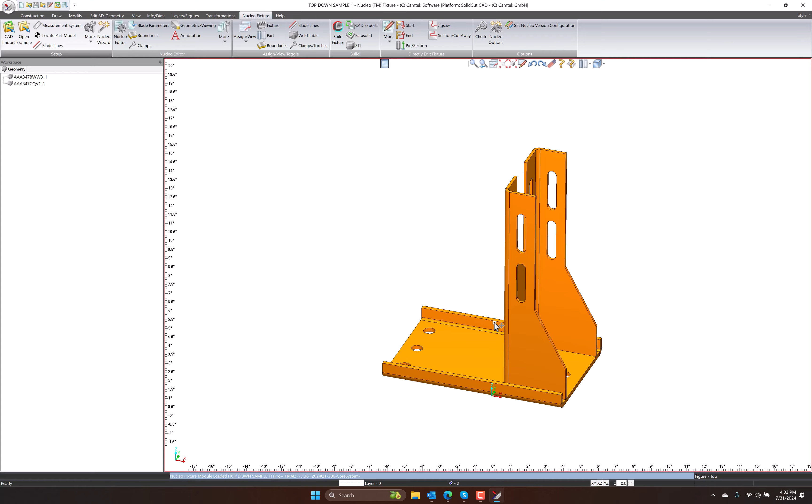Okay, today we're going to be reviewing the new feature that we've recently added called Side Locator. You have a part similar to this where we're welding around the base, but none of that part sticks over top. We know that's difficult in Nucleo to design a fixture for. So we've come up with a new method.

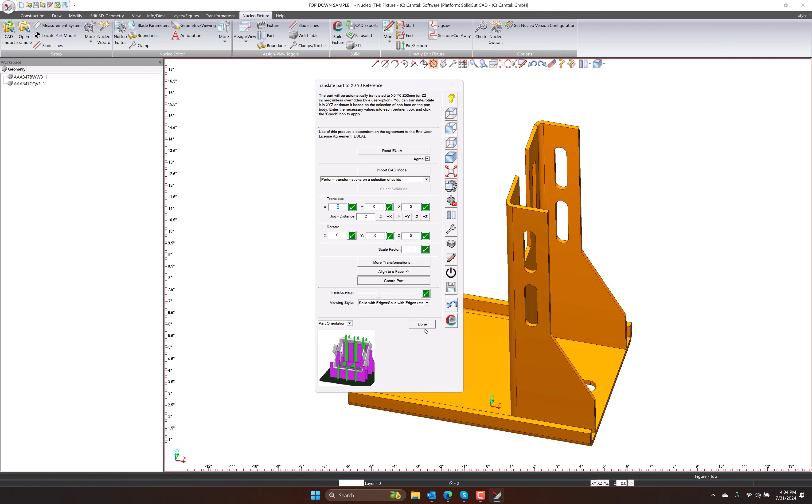What we're going to need to do is start by locating the part model where we would like it in the plate. And then from there, what we need to do is draw a plate that is going to have this shape cut through it so that the part can slide in and then be located. And then this will be fixtured off of the back side here with some lines and arcs that will allow us to get access into the side here for welding.

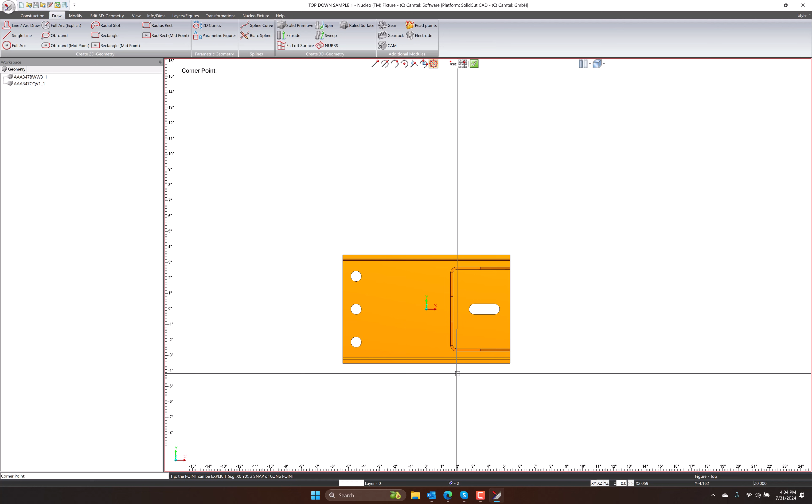So to quickly do that, you can just come here, just draw a rectangle. You can make it identical, but for myself, we're just going to say about right here. And then we'll just kind of bring it up to about here. And then the other thing I want to do is I'm going to make another one. This time I want a radius rectangle. It's asking us for the radius in the corner. Let's just put a 1/4 inch radius in there. And then we'll say that'll be this here. And then we'll go to modify, quick trim, just trim this out.

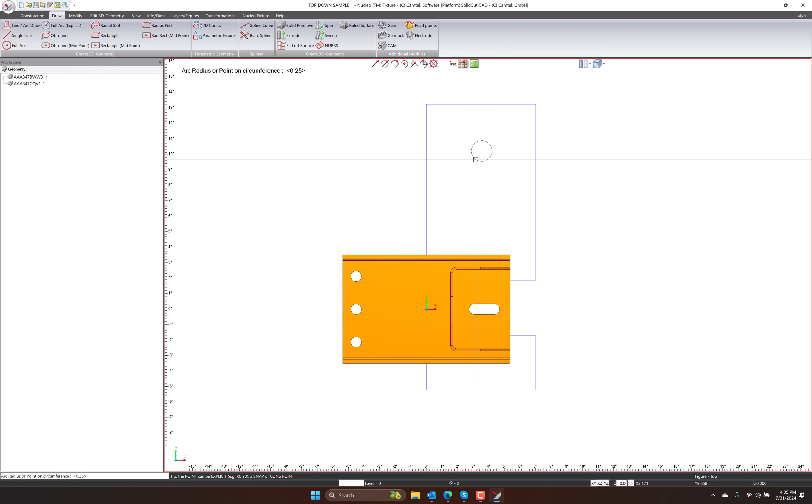Okay. Lastly, you're going to need a method to secure this plate onto this stack of plates here. You can do either a hole in the plate that we can put through the base plate, run a rod up through, and then a wing nut or something, or you can just put another clamp that pushes down on here. It's entirely up to you how you want to do this. For this exercise, I'm going to draw a circle about right here. We're going to be using a 1 inch diameter rod, so we'll put in a .515 radius circle. Give us a little bit of clearance.

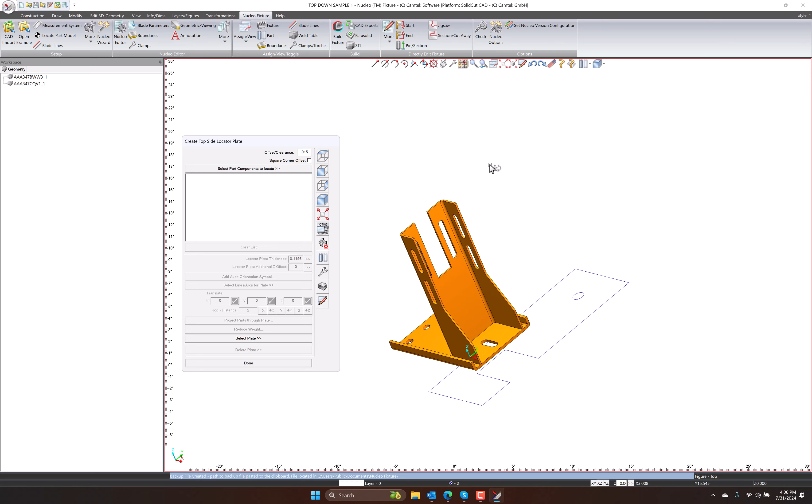So once that is completed, our next step, and this is prior to designing your fixture, is going to be going to more and then Side Locator. So the first thing it's asking us for is how much part clearance do we want in this plate? I want a 15 thousandths clearance. When we look at sharp corners, do we want to offset them so that they are sharp, or do we want to offset them so that it blends a radius in? I'm going to say I want a sharp corner for this one. Select the parts I want to locate. I'm going to locate this part.

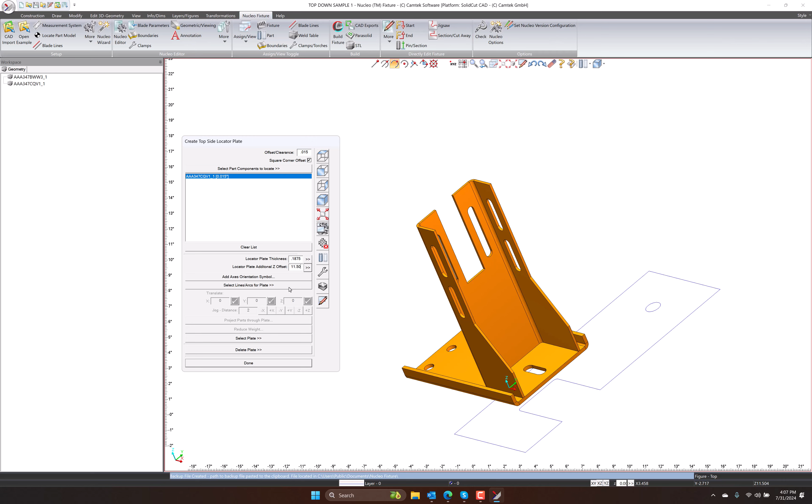And now it's asking us what's the thickness of this plate. Let's say it's going to be 3/16. Where am I locating it in Z? We'll locate this, let's say, along the midpoint of that line. I'm going to clean this up to say 11.5 inches. And now it's select the lines and arcs for the plate. So I'm just going to draw a window over those lines and arcs. And you can see now it projects up that shape to that plane.

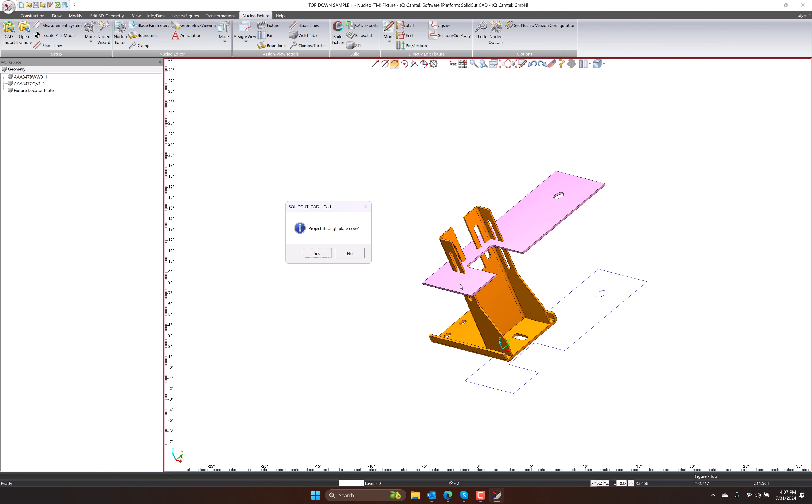And now it's asking us, do we want to project the parts that we selected through this plate? What it's going to do is look at this straight down in Z, create an outline body of the entire shape, offset it the amount that we gave it, and then project that and cut it through this plate. You can see that is what has been done here. Our corners are nice and sharp. And if we look straight down on it, we can see we have clearance around the part.

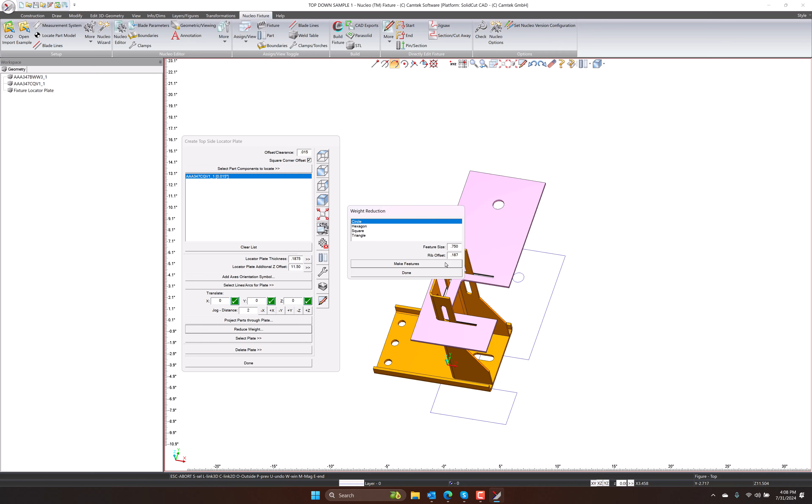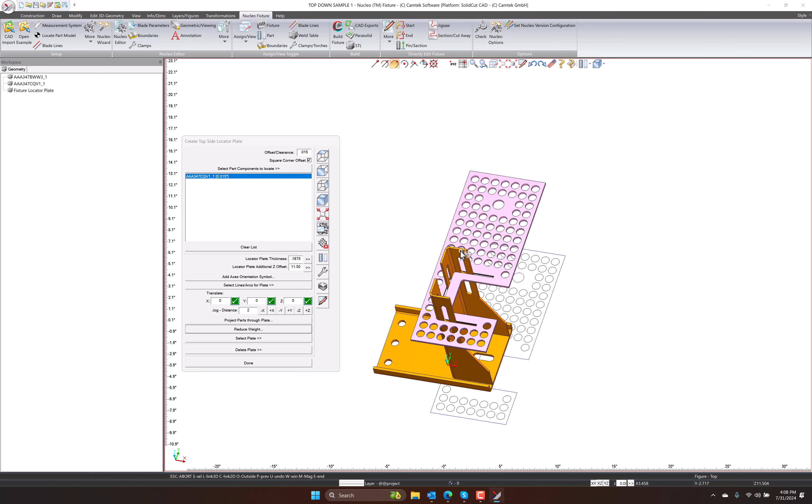So from here, we have a couple more options. We can do weight reduction, which allows us to cut a circle. Let's say some 3/4 inch circles. I want a thickness of the ribs in between to be 3/16 as well. Make features. You can see all the features that it draws on the screen and then pushes up through the plate. If you put in a very small number, when it goes over 100, you'll get a warning letting you know that could take a little bit of time to complete. So once you're all completely done here, you'll just hit finish and done.

And then from here, it's a matter of creating your fixture, fixturing this up as well, and then making sure that you give yourself room to get your torch in here or wherever needed.